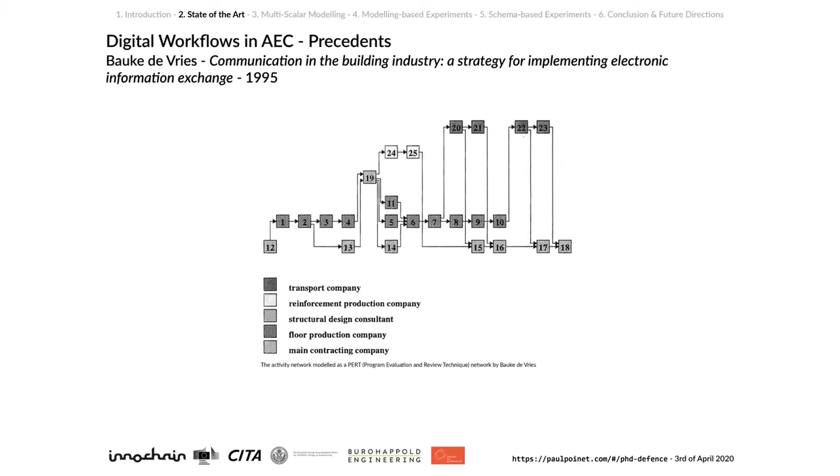And this separation of concern, actually, we have seen it emerging in the AEC industry. So now I will go through different precedents, from 1995, with Bauke de Vries, who identified different companies and identified the links between them and the data exchange between them.

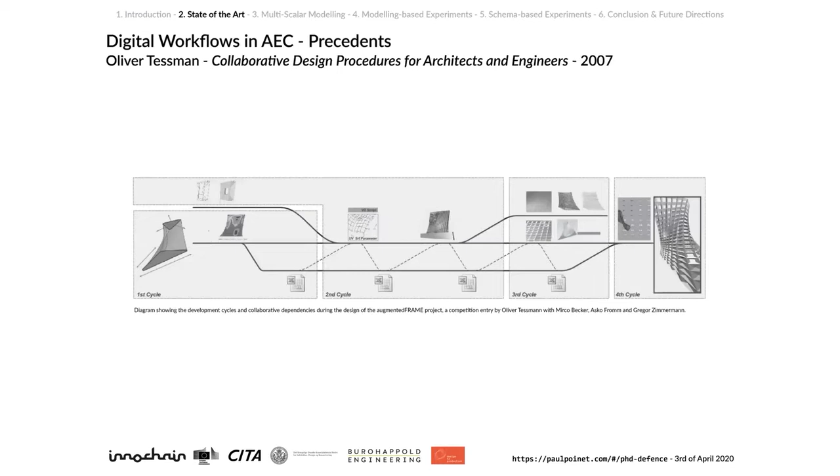To Oliver Tessman, in 2007, in his thesis, he actually identified different design cycles in the design process, design to production. In 2010, they also highlighted the different CAD models that were needed and the different extension files that were talking through each other through the design process of the Centre Pompidou in Metz.

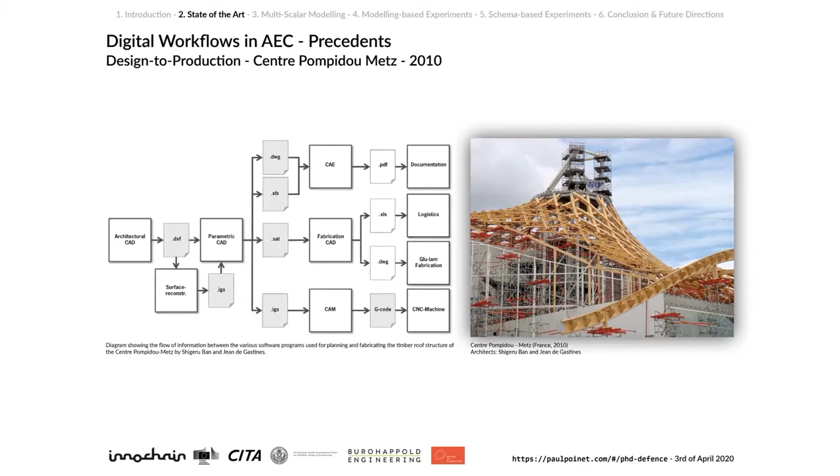More particularly, there is also this very interesting case study from Front Inc. and BuroHappold Engineering, who were involved in the conception and construction processes of the Morpheus Hotel, designed by Zaha Hadid Architects in 2015.

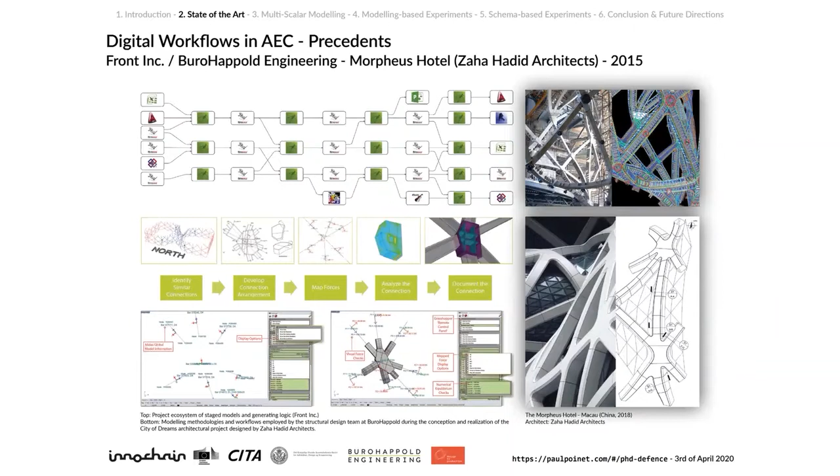So you can see on top is the building information generation from Front, where they highlighted the data exchange between different Grasshopper sessions where data was generated, and sessions of Rhino files where data was stored and where metadata was attached to. And at the bottom is more the engineering perspective, who had to deal with structural analysis at different levels and pass information between different scales.

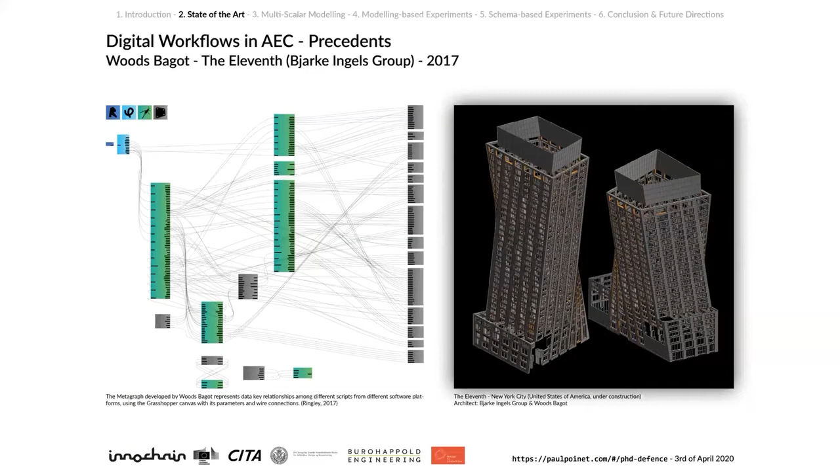There is also this example from Woods Bagot in 2017. This is the Eleventh project, a housing project situated on the High Line in New York. And here you can see they actually mapped all the data exchange between different Grasshopper and Rhino files throughout all the design process of every single building component.

Of course, this development effort does not only happen within architecture firms, but also from the perspective of the software industry. So here there is the example of McNeel, who quite recently introduced Rhino Inside and Rhino Compute technologies. Rhino Inside enables running Rhino and Grasshopper inside other applications which have a .NET API, such as Revit and AutoCAD, and Rhino Compute presents a REST API from which expert users can actually call Rhino functions on a server.

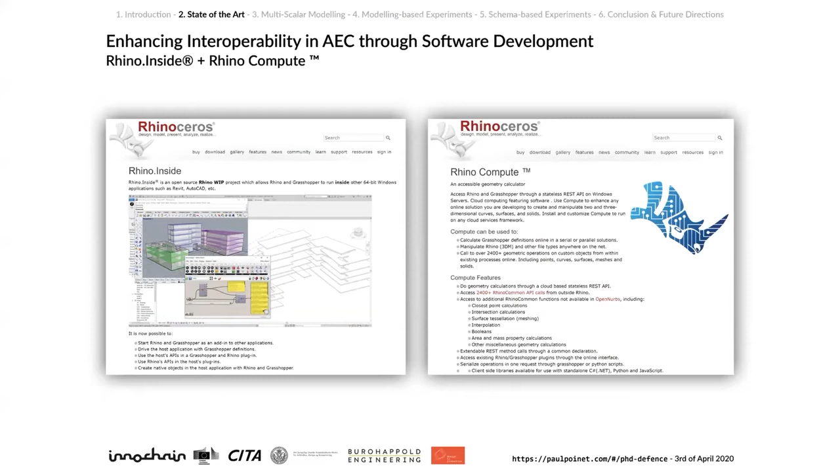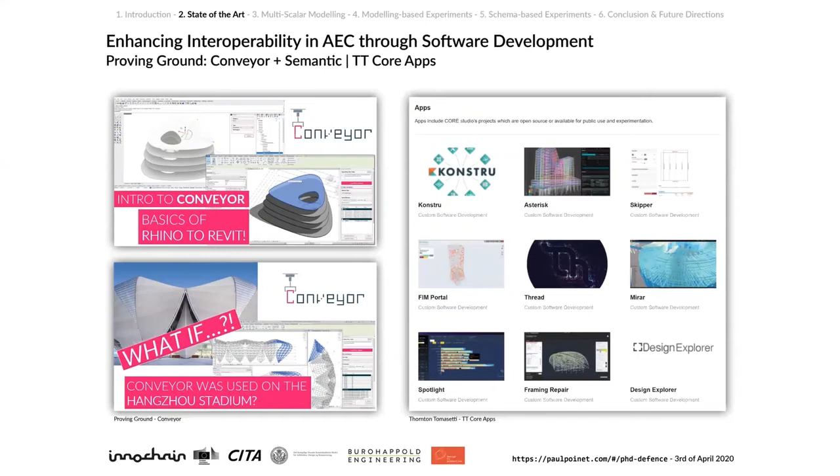Beyond the software industry, there are also consultancy practices or engineering firms that develop their own applications to help other architecture firms, such as Proving Ground with Conveyor, or the different applications developed by TT Core. And we also see the emergence of data platforms for AEC.

I'm sure quite a lot of you are familiar with Flux, which ceased to exist in March 2018 for financial reasons, but it was used by more than 6,200 companies in 150 countries, and a lot of computational designers, engineers, and BIM professionals relied on this platform. The legacy of Flux, I think, is both Speckle and Konstru. There are other data platforms for AEC out there, but those are the two main ones that I personally know, and you will see later in the presentation that Speckle was particularly relevant for a set of experiments in my thesis.

From the state of the art, we can start to extract a convergence of concepts. There is a general trend in developing neutral, open source custom tools and frameworks to break the silos. We try to improve interoperability through custom software development, enabling the transfer of data-rich and complex geometrical objects. The industry also tries to keep geometrical objects as lightweight as possible for serialization and further reconstruction, using extensible neutral formats to facilitate both object customization and interoperability. Finally, the industry always tries to segregate the different levels of modeling from design to fabrication.

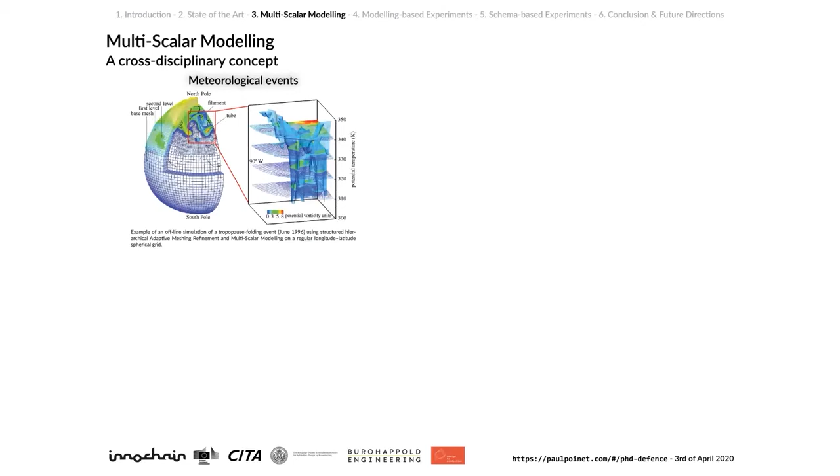This has been used, for example, to model meteorological events, or looking more specifically at material behavior, or in computational fluid dynamics or structural behavior simulation through adaptive mesh refinement. Multi-scale modeling has also been implemented more recently.

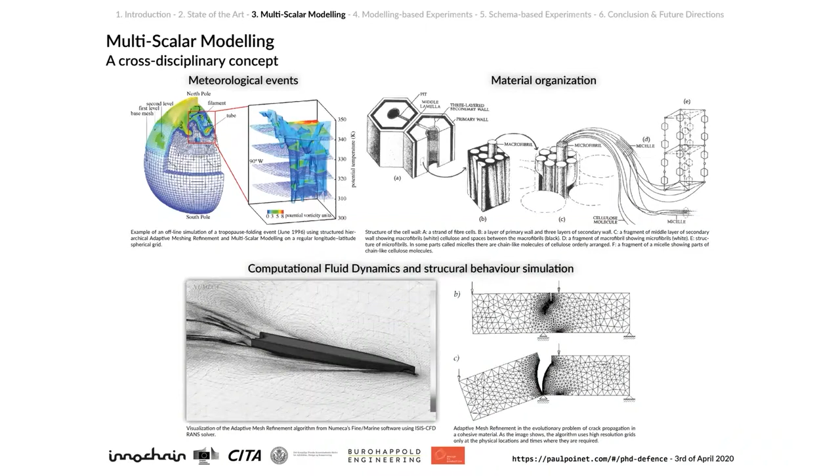And also more recently in architectural design research, through coarsening and uncoarsening strategies that allow communication between different levels. We have also seen the implementation of multi-scale modeling.

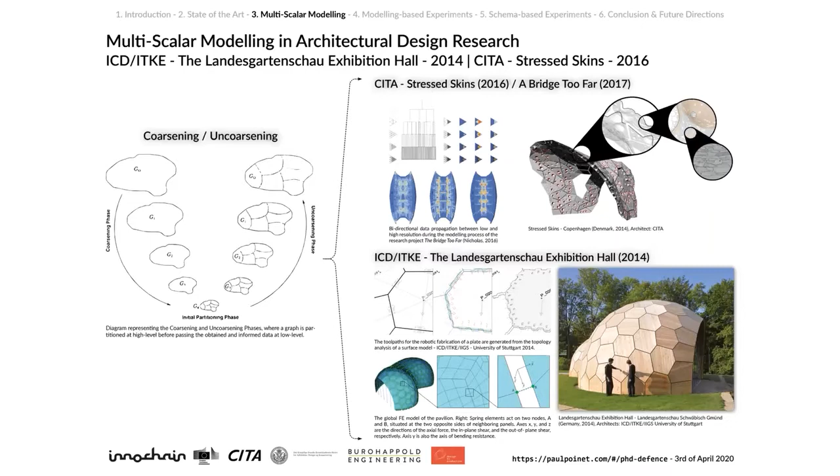For example, at CITA, through the Stressed Skins and Bridge Too Far projects, which implemented adaptive mesh refinement methods, or with ICD/ITKE, who looked at passing different simulation frameworks across different scales for the Landesgartenschau exhibition hall in 2014. The different methods try to define coarsening and uncoarsening strategies to navigate across multiple levels and resolutions, setting up connected pipelines, design workflows, and handshake techniques to deploy these strategies, as well as deploying simulation frameworks and optimization strategies across the previously defined pipelines and design workflows.

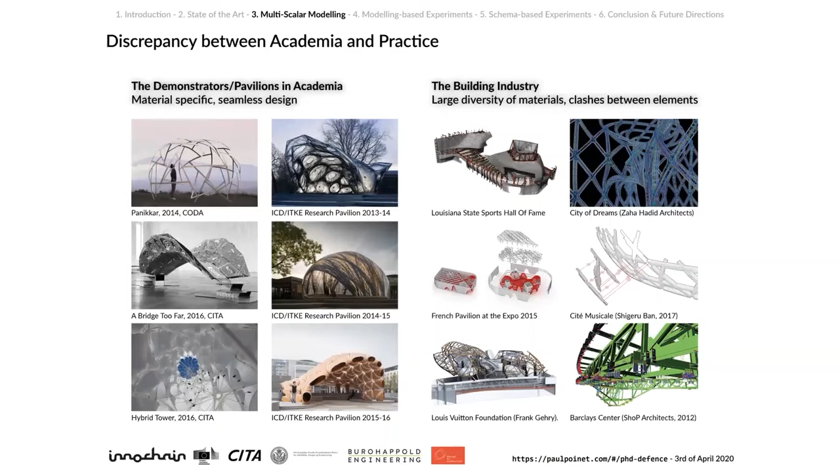However, I think it's fair to recognize there is a discrepancy between academia and practice, because all the demonstrators and pavilions built in academia present very material-specific and seamless designs, rather than in the building industry, where we actually face a much larger diversity of materials, more clashes between elements, and of course many more trades involved in the process.

In terms of data classification and data generation, I think they are also very intertwined. We can spend a lot of time upfront setting up all the workflows in academia - think of the dynamic data tree in Grasshopper - but then it's hardly sustainable at late stages. On the other side, in industry, the generation of data and classification are more independent from each other, less intertwined, so the user is more free to operate classification changes whenever he or she wants during the design process. It proves to be more sustainable at late design stages, if you think of the static layer table in Rhino. So we have these different points from the multi-scalar modeling frameworks I enumerated, as well as the points extracted from the state of the art of the AEC industry.

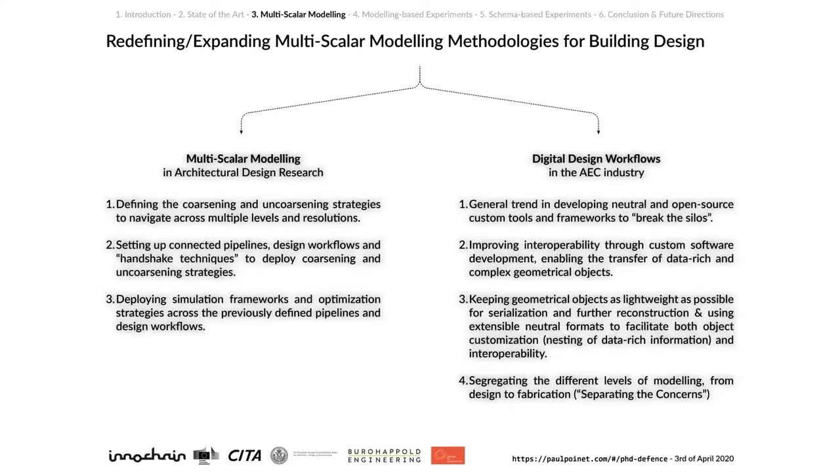The question is, can we actually expand the multi-scalar modeling framework so that it incorporates these points from industry? The overall methodology of the thesis work is placed under the scope of research through design, which involves iterative experimentation and prototyping.

Physical prototyping was defined by Thomsen and Tamke in 2009 as a materially led investigation allowing exploratory testing of craft and material behavior. But all the work of my thesis involves only digital experiments, so I look more at digital prototyping or virtual prototyping, which is a shared method of digitally designing and investigating a product or process, defined by Patrick and Lindsay in 2003.

There are different categories of experiment: design probes, and the prototypical application, a term I define which, contrary to a software application that is robust enough to be deployed through multiple machines and shared amongst different parties, remains at an experimental stage—not developed enough to be considered a proper software application.

Then the demonstrator actually deploys the prototypical application through stress tests. A stress test is a term from the software industry that verifies software through heavy load conditions. But since this thesis does not pretend to undertake robust industrial software development, stress testing here refers more to the deployment and testing of a prototypical application against multiple models or case scenarios.

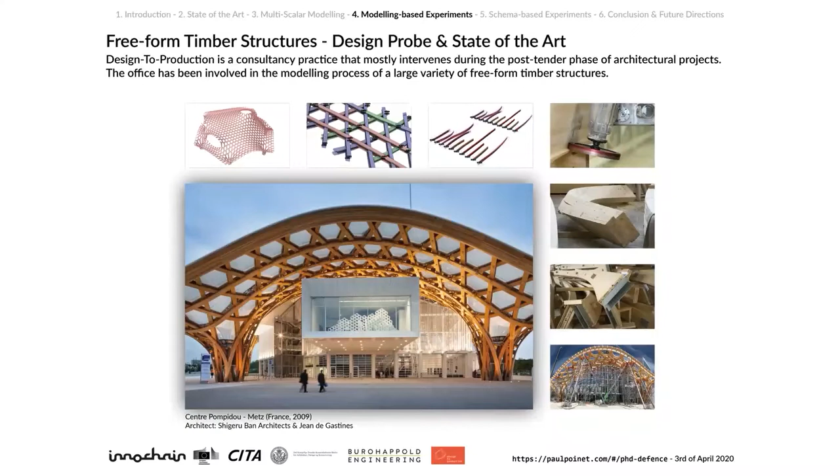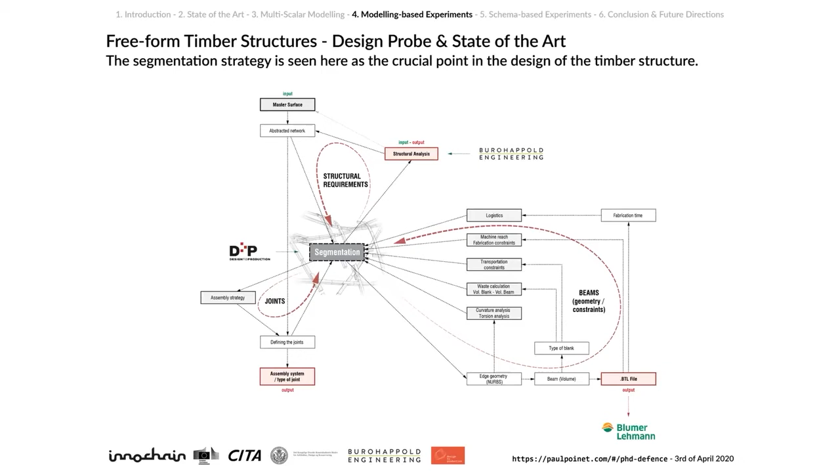As you understood, Design to Production was one of the industry partners. It was great to observe how they managed data from the global network to the modelization of particular design components. They sit at very crucial points in the design process because they have to take into account many different aspects, for example the structural requirements from the engineers to the geometry constraints and logistics from the fabricators.

So then I started to tackle this through multi-scale modeling, to define the different levels that appear through the conception of a free-form timber structure, from high level looking at the abstract network, to intermediate level looking at a patch of different components, to low level looking at one particular component and material level.

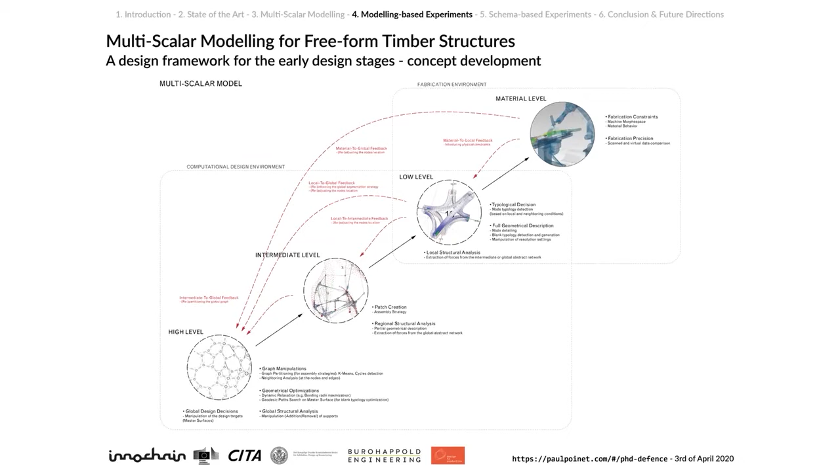Here is the first experiment, which looks at blanks. Blanks are the raw glue-laminated timber piece, which is milled down to the final shape of the segments. For different geometry complexity, you have different types of blanks that are created, from straight blanks, single curved, double curved, and so forth.

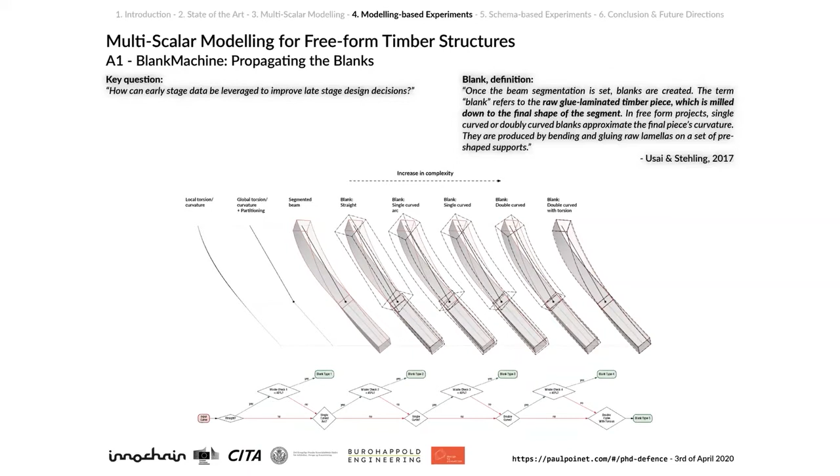Here is a video showing that by manipulating a waste percentage parameter, you get different types of blanks. The result is that this prototypical tool proved to be useful to generate blanks and steer the geometry at high resolution by manipulating very low-level parameters.

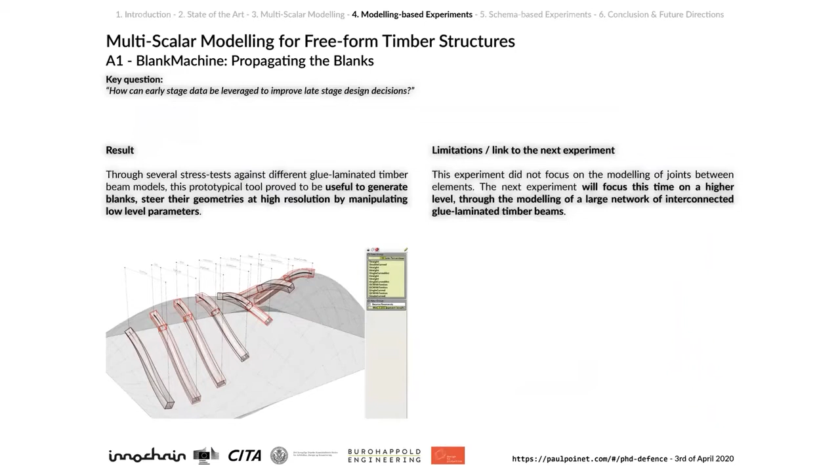But this experiment did not focus on the modeling of joints between elements, so the next experiment focuses this time on the higher level through the modeling of a large network of interconnected glue-laminated timber beams, which is topological mapping modeling of lap joints. Here I started to set a framework where communication could happen between a graph at a high level and the generation of lap joints at low level.

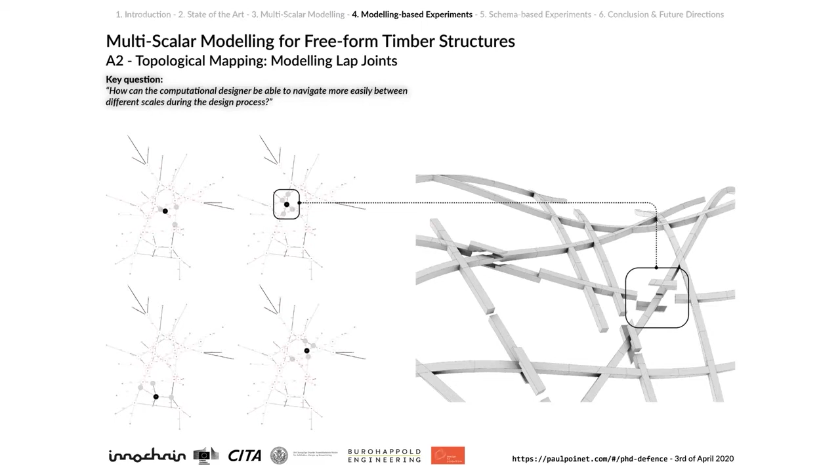The user was able to select one particular joint and look at it more precisely within the 3D model. This helped the user visualize complexity, search, and query the model in a more intuitive way than through direct modeling methods.

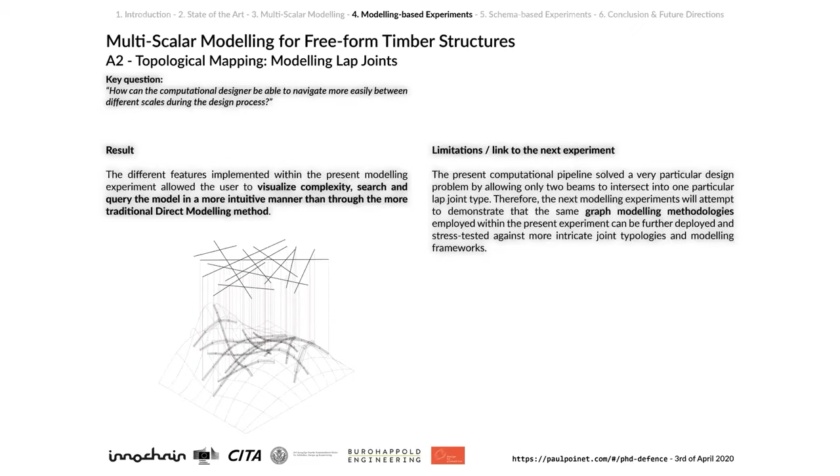However, this computational pipeline solved a very particular design problem by only allowing two beams to intersect. So the next modeling experiments demonstrate that the same graph modeling methodology employed in the previous one can be further deployed and stress tested against more intricate joint typologies and modeling frameworks.

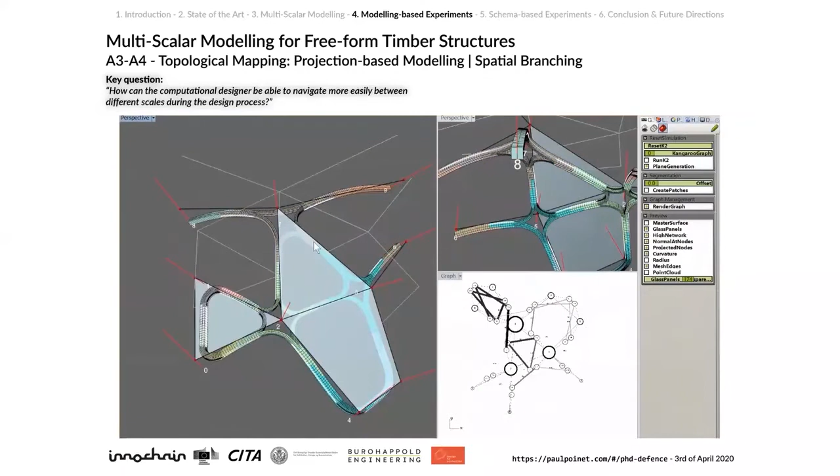This video highlights this idea where the user was able to very simply draw an abstract network at a high level, and you had direct segmentation happening at low level, glass panel generation. You are informed about the connectivity through the graph.

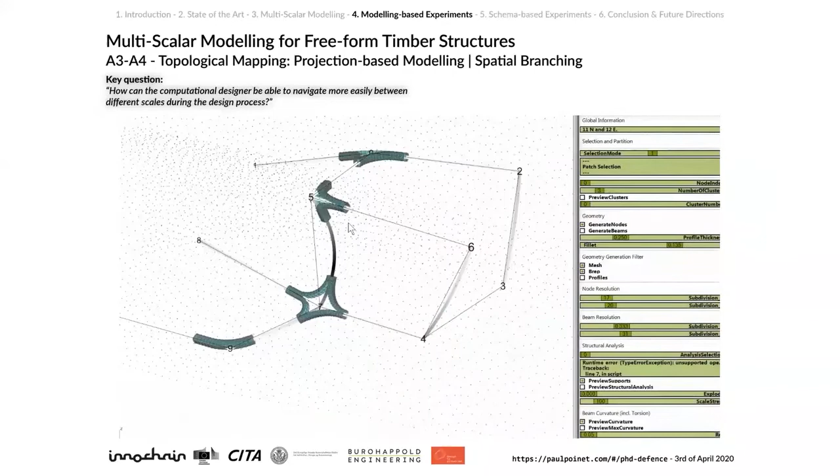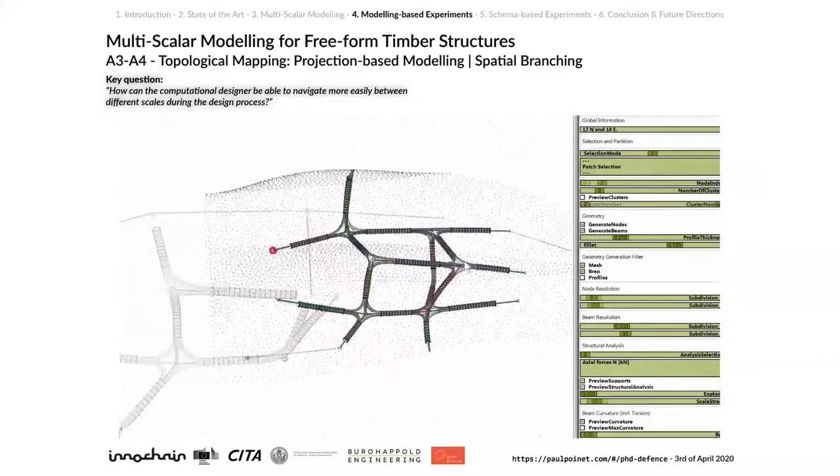This was happening only on one reference system, and then I was trying to add multiple reference systems, so different master surfaces, and also embed simulations, structural simulation, at high level and also at low level by focusing on one particular node.

These are the types of outputs from these experiments. It actually presented a frictionless user experience during the design process while navigating between the different scales. But it was actually quite challenging to craft every single design exception in such design process.

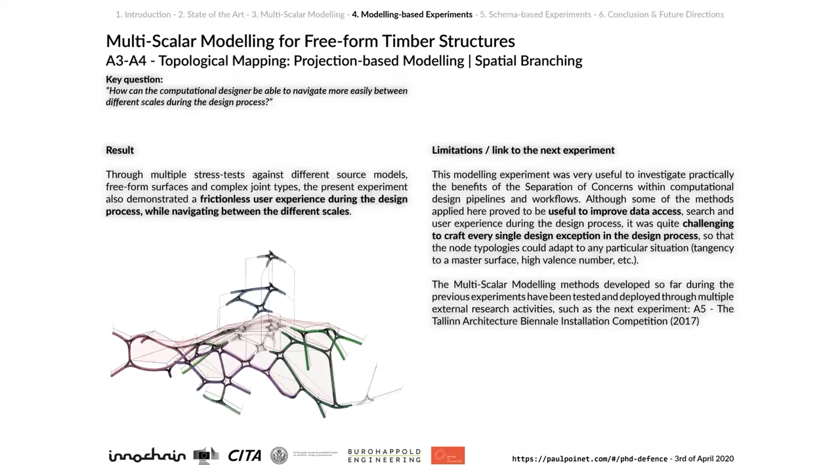The multi-scalar modeling method developed so far has been tested and deployed through other research activities, such as the next experiment, which is the Tallinn Architecture Biennale installation competition, a common work done with Thomsen, who is also a PhD fellow at CITA and part of the InnoChain research framework.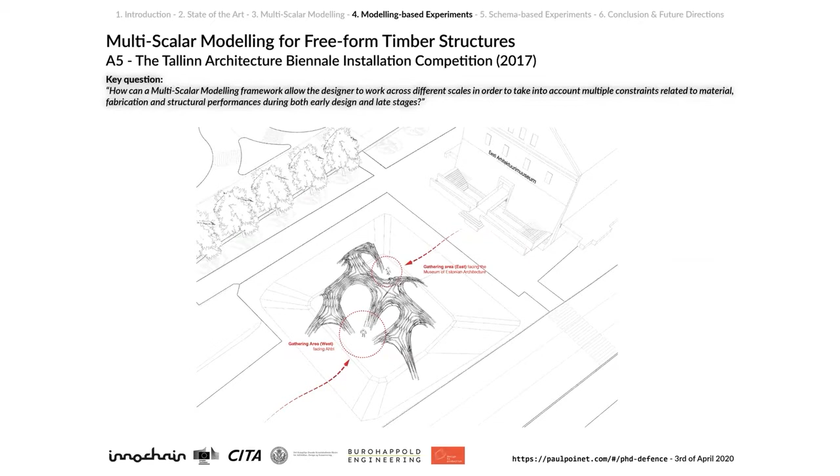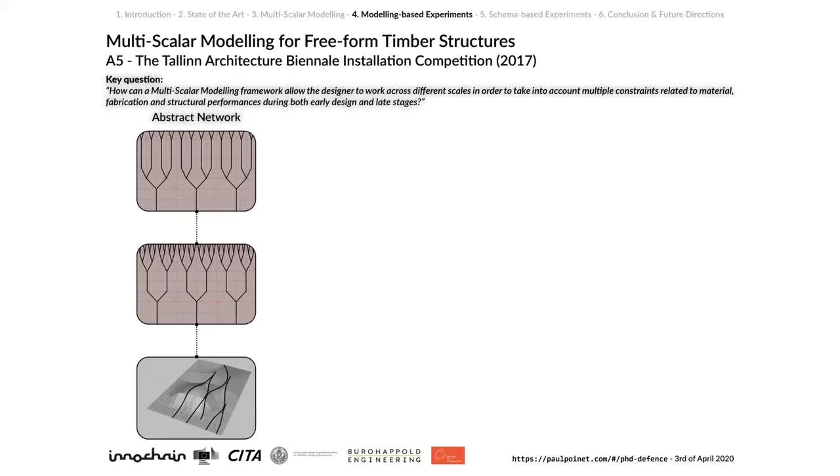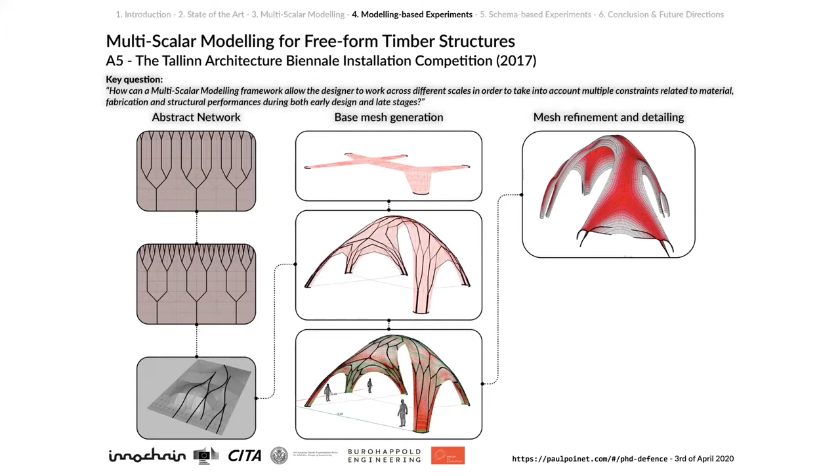You can see that during the conception phase of this project, we actually employed similar multi-scale methodologies, looking at abstract networks through base mesh generation, and then more finer mesh refinements and detailing.

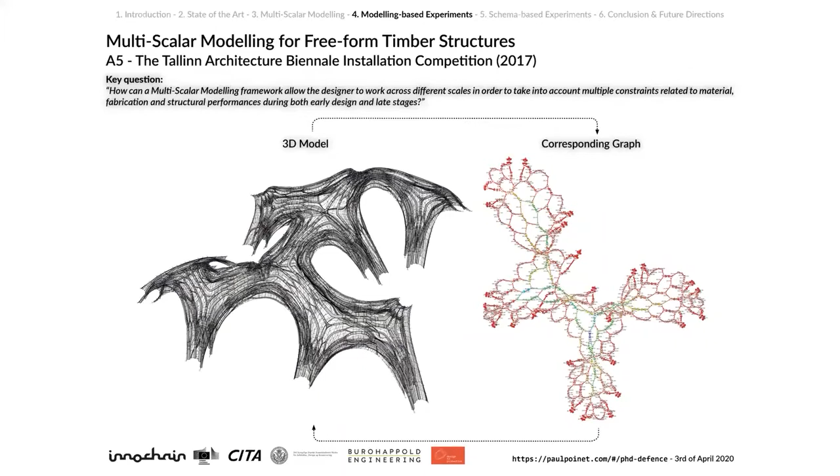So then we could actually set bidirectional workflows between the 3D model and the corresponding graph, which highlights all the complexities of every node's valence that were present in this timber structure.

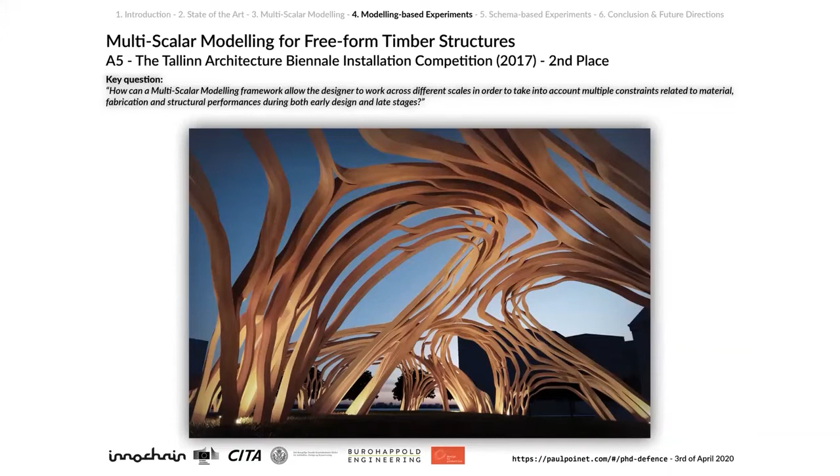So this is the final outcome, this is a render. It wasn't built, we got to the second place. But even if it wasn't built, we also looked at fabrication strategies.

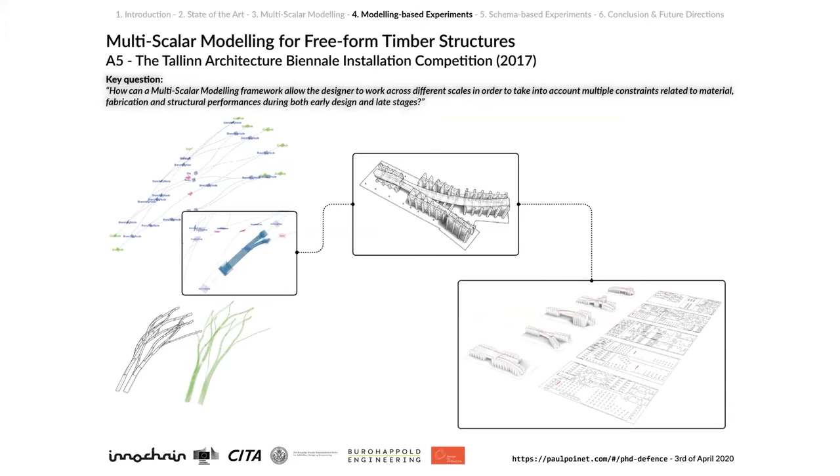How can we actually extract one particular component and generate all the data necessary for its fabrication. So here, a glue laminated timber piece.

And of course, there was also the question of feedback. So here I illustrated how we go from the mesh-based graph to the beam model, to the material model, and so on. But we also question how the lower level could actually feedback the higher level.

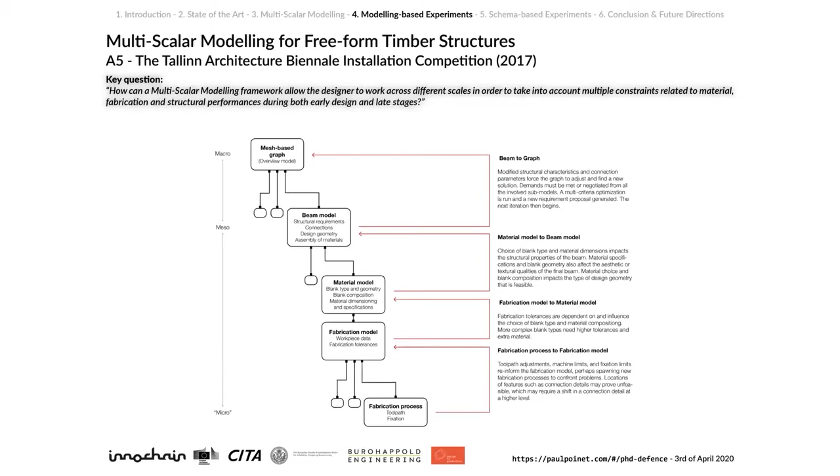So learning from this experiment, I think we realized that seamless design strategies and integrated feedback loops only exist partially and not globally. Communication can be also quite difficult, and a certain amount of residual models were created for this demonstrator scale research project.

So coming back to the discrepancy between academia and practice, I think in academia we have the luxury of total control over design intents, but in industry it's more of a fallacy. Design happens throughout the project with the participation of all trades until completion of the building.

Like this quote from Donald Knuth in 1974, who stated that premature optimization is the root of all evil. So as soon as you start implementing design and making decisions on top of your former abstract design space where you had a lot of flexibility, then the design space becomes very heavy and inflexible.

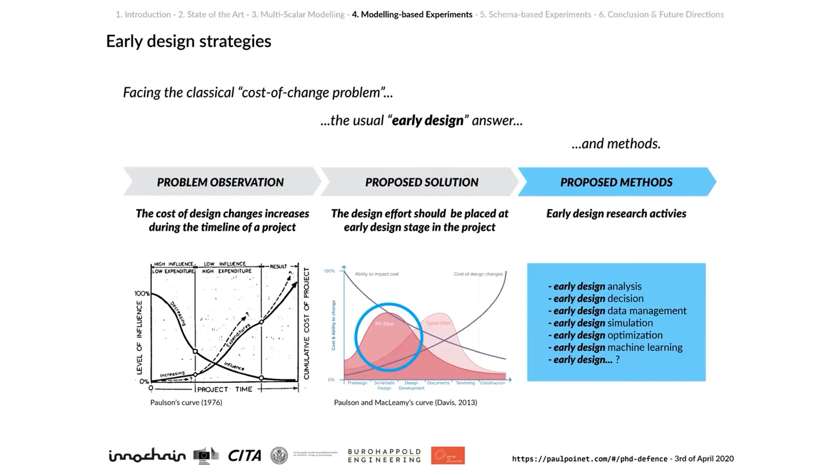I'm sure most of you know the cost of design changes curve, which increases during the timeline of a project. The proposed solution is saying that the design effort should be placed at early design stage, and then there is the consequence: methods, early stage design activities, to tackle this and flatten the curve.

Of course, late stages can be prevented, but I think they will ultimately have to be challenged. So I think we also need to focus on late stages concerns. This leads me here to the schema-based and cross-practice collaboration experiments, which tackle more particular late stages strategies.

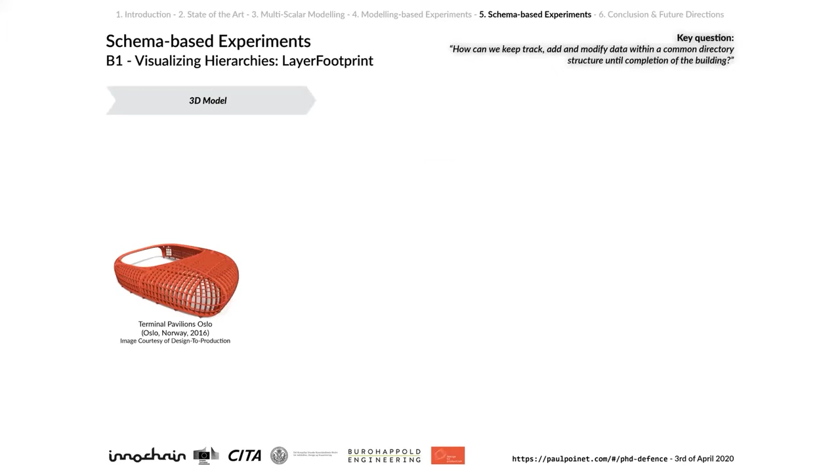Some of these trees are used to classify the data. Some are actually used to link parametrically elements, geometrical elements, such as in digital projects. So looking at this, I was also very interested to look at how Design-to-Production actually classify the data throughout all the design projects.

I was interested in investigating alternative means of representing this complexity, which led me to move from the directed acyclic graph to the more simple sunburst diagram. This sunburst diagram highlights the hierarchy between the different layers, and each offset represents the number of objects contained within one layer.

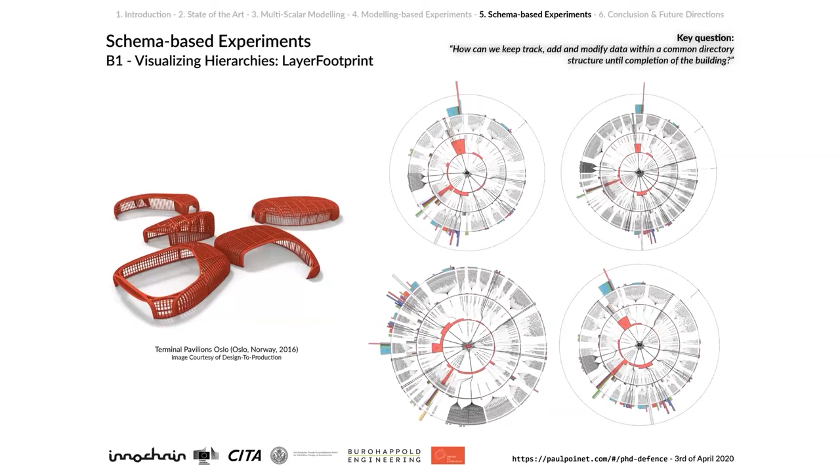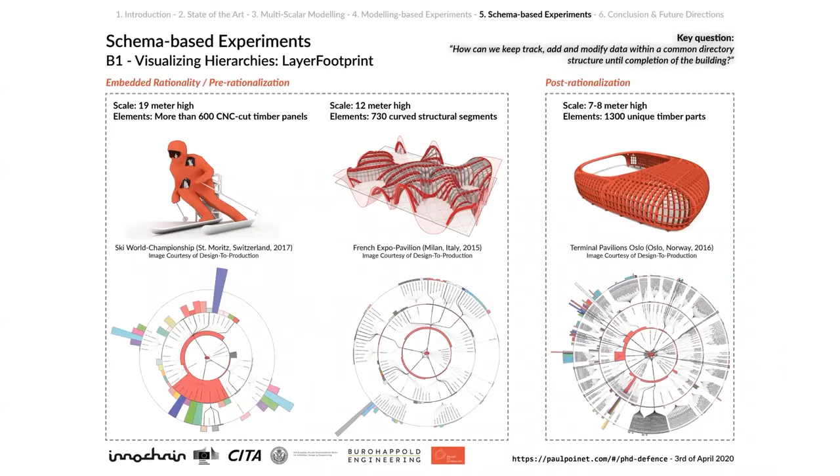So this experiment called Layer Footprint could leverage data and highlight the model's intricacy. However, the amount of information displayed by Layer Footprint may be too intricate and complex to be grasped as a whole. So the next experiment tried to extend the capability of this experiment by integrating more features.

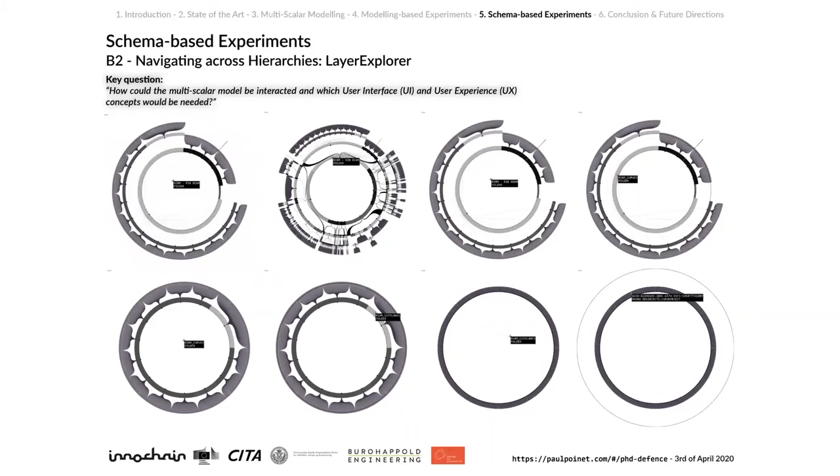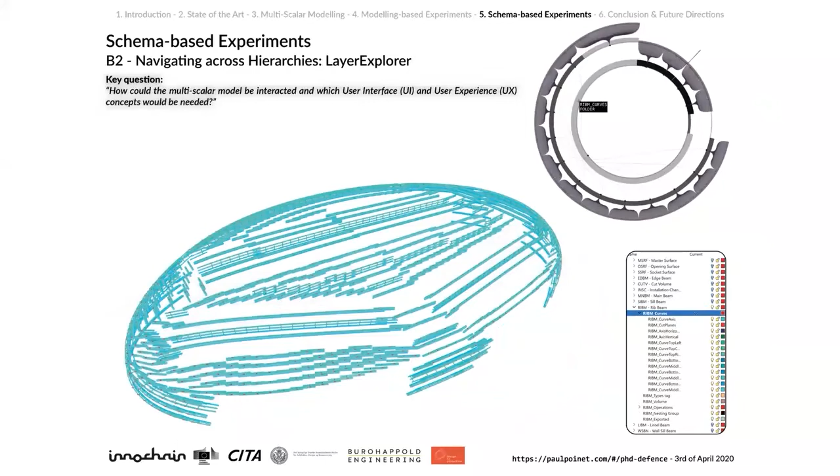Layer Explorer takes a similar sunburst diagram, but enables the user to navigate through it and focus on different branches of the layer structure. Each slide corresponds to a certain level in the layer table, and you can do that until you reach very specific components of the building.

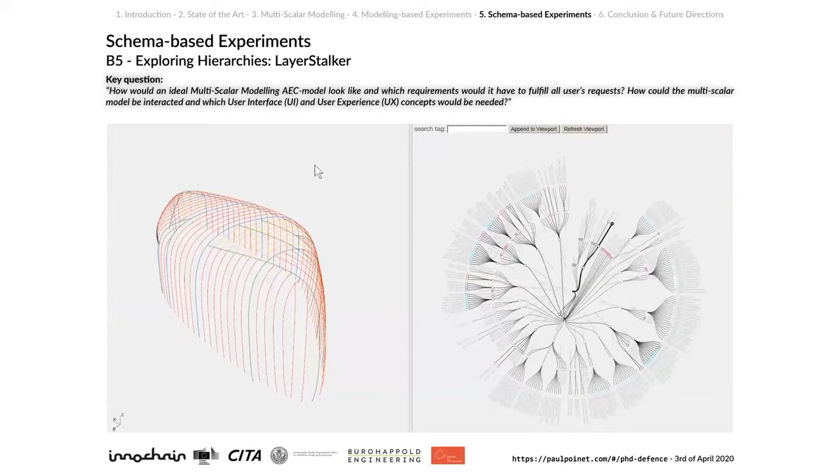Here the user is finally able to focus on local levels and navigate between them. But this experiment, although it was presented alongside the 3D view, actually operated outside the 3D modeling environment. So the next experiment tries to embed such an interface directly within the 3D model, like LayerStalker here.

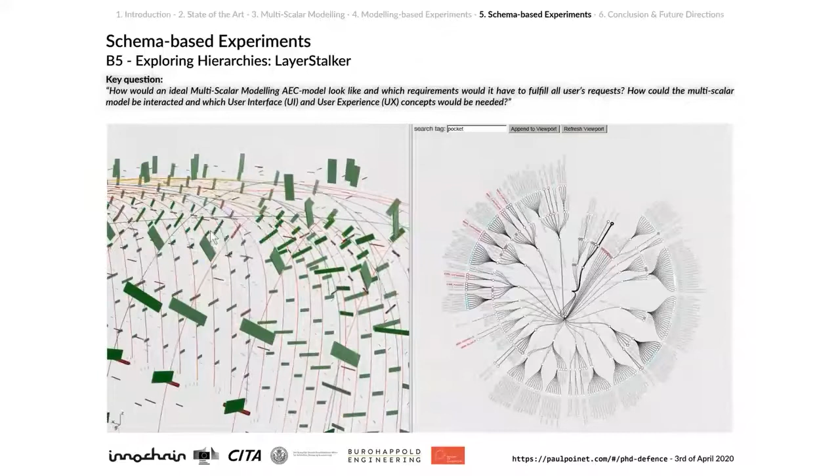This also embeds other features. The user is able to type a certain tag or word, which will highlight all the layers whose name contains this specific tag. Then you can display the corresponding information in the viewport, refreshing it, and so on.

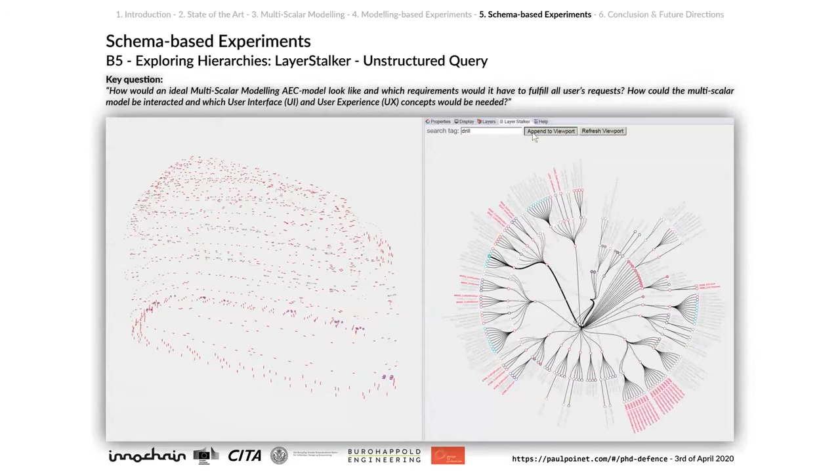So you could perform unstructured queries and structured queries as well, if you wanted to focus only on a particular leaf. This experiment demonstrated the possibility of performing both structured and unstructured queries from the 3D environment within the graphical user interface of LayerStalker.

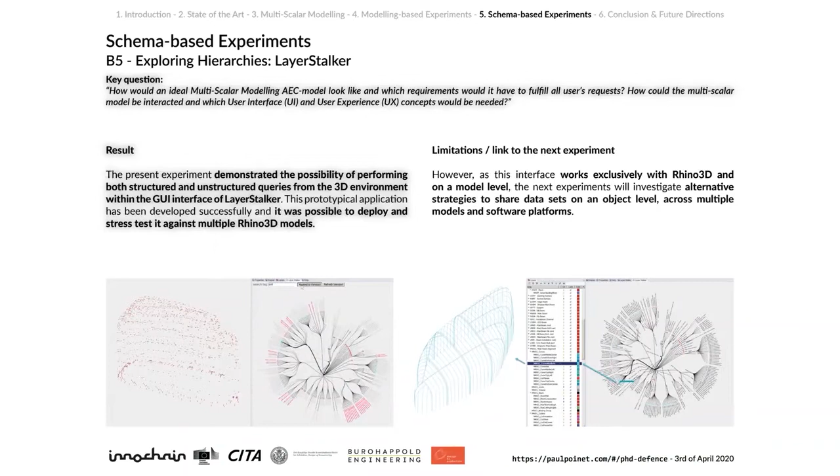But it was possible to deploy and stress test it against multiple Rhino3D models. However, this worked exclusively with Rhino, one particular software. So for the next experiment, I wanted to investigate alternative strategies to share data sets on a more object level, across models and software platforms.

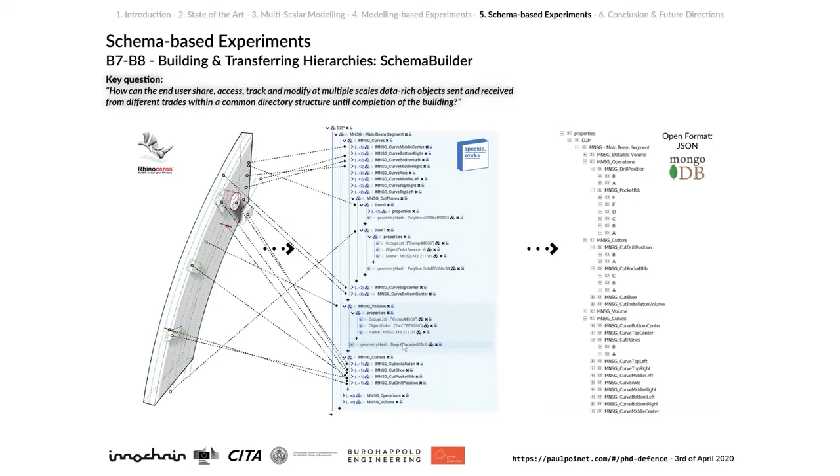So here I looked at one particular object where you can see it has many different sub-objects and a very intricate hierarchy of objects contained within it. I was able to transfer this object via Speckle and retrieve the hierarchy in another, still Rhino, but a different Rhino session.

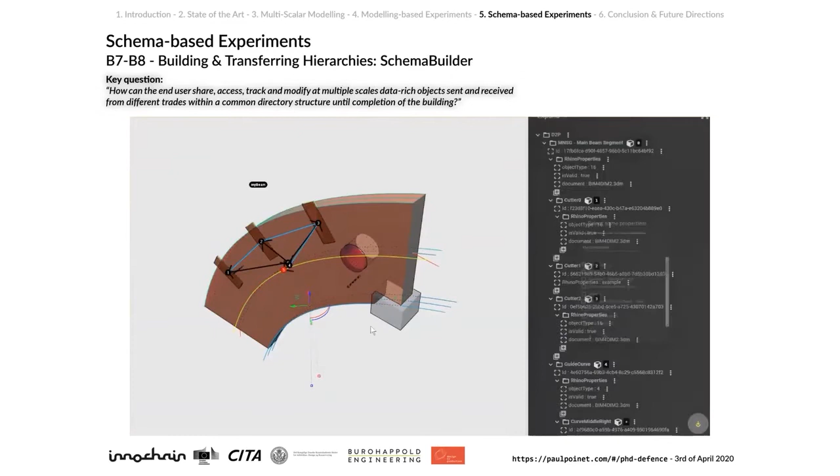Through the interface, the user is able to select one particular item and add it to the tree, select some properties to keep, and add it to whatever leaf is in his personal tree. Each time you add a sub-object to an object, the parent-child relationship is highlighted in the 3D model on the left.

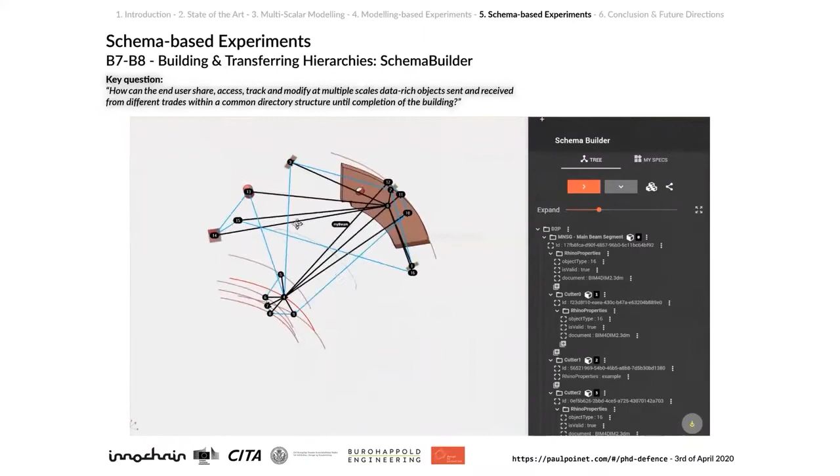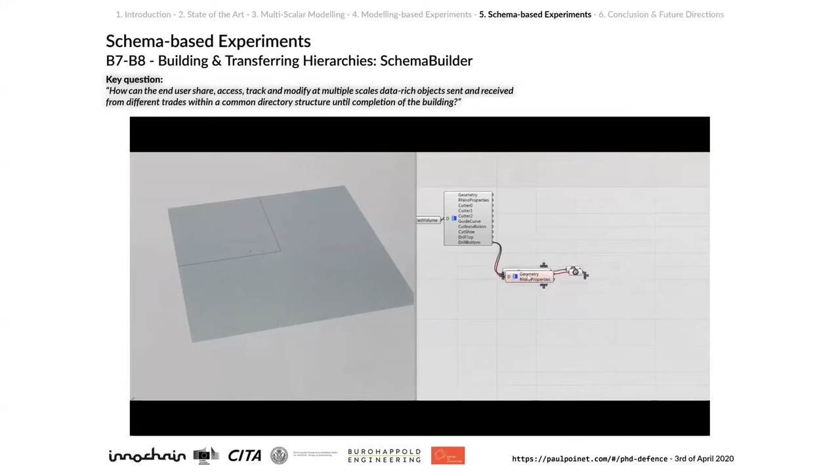Soon you will see that the object will explode, and finally you can receive this hierarchy that was sent via Speckle. You receive this hierarchy in another Rhino Grasshopper session, where you can unnest all the data contained within this object.

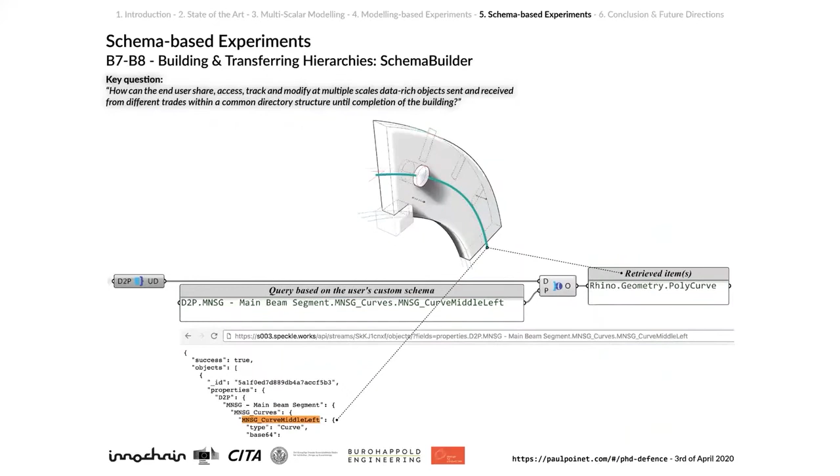You could also retrieve one particular piece of item. This experiment demonstrated the possibility of building a data-rich hierarchy of objects and transferring it via Speckle to another Rhino Grasshopper session. But in the next experiment, the data exchange operates from and to the same software platform, and the schema remains the same.

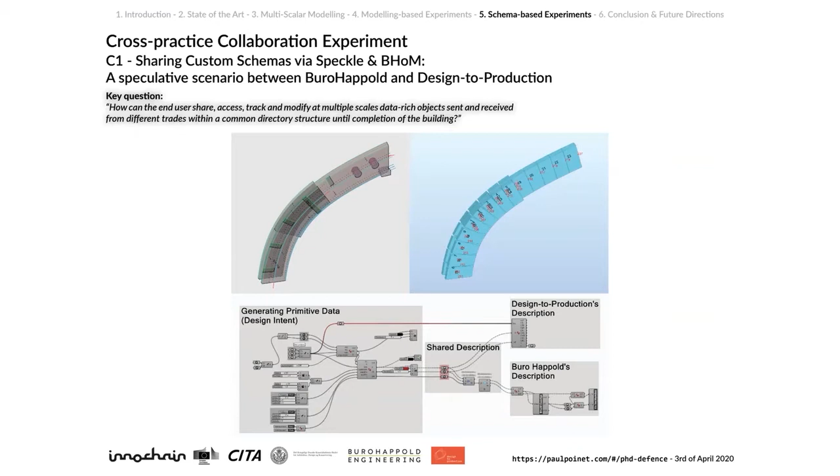The next experiment investigates how to transfer a similar object across a different host application and adapt its schema accordingly. This is the first cross-practice collaboration experiment between BuroHappold and Design to Production. You have to imagine that all the hierarchies I showed so far are from design to production, so they are really focused on the geometrical description of the objects and have their own tree structure.

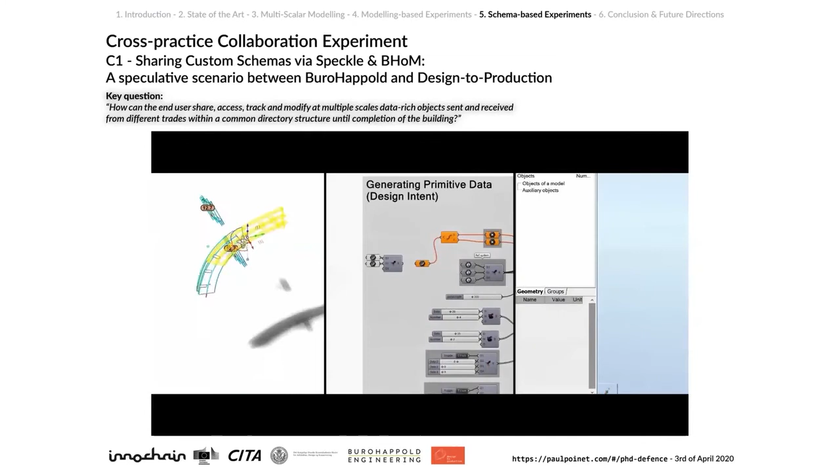But of course the engineering firm is not particularly interested in geometry, but more in the structural description of the same objects. So the company has another worldview on these objects. The question is then to identify and find the common, shared description of this object—which could be just two endpoints, or one polyline, or a set of different planes—that can be set as a shared description from which the two different companies can communicate. This is highlighted here.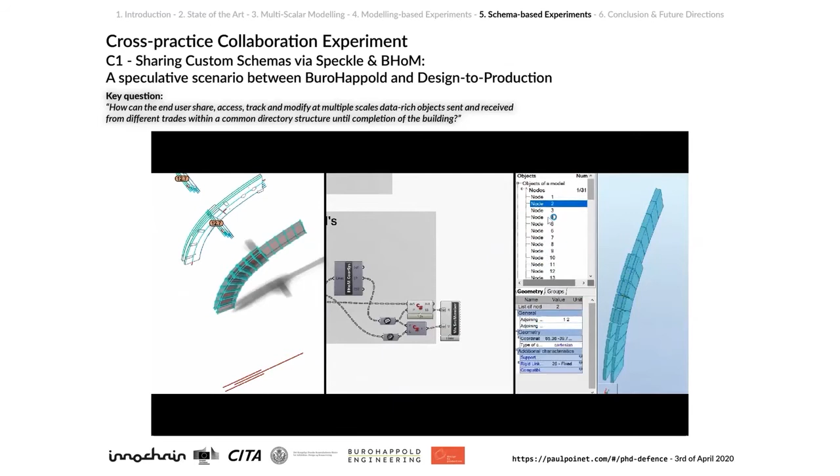So the schema actually combines a transfer via Speckle and BHoM, which is a Buildings and Habitats object Model, also an interoperability framework developed by BuroHappold. Through this experiment, you could see that you could transfer one object from Rhino to the robot software package for Autodesk. This cross-practice collaboration experiment hybridizes modeling-based and schema-based strategies to transfer data-rich geometrical information across trade and scale.

But although successful, it focused particularly on the local adaptive object schema. I think we still miss the bigger picture of the project scale. So this is what the next experiment is focusing on.

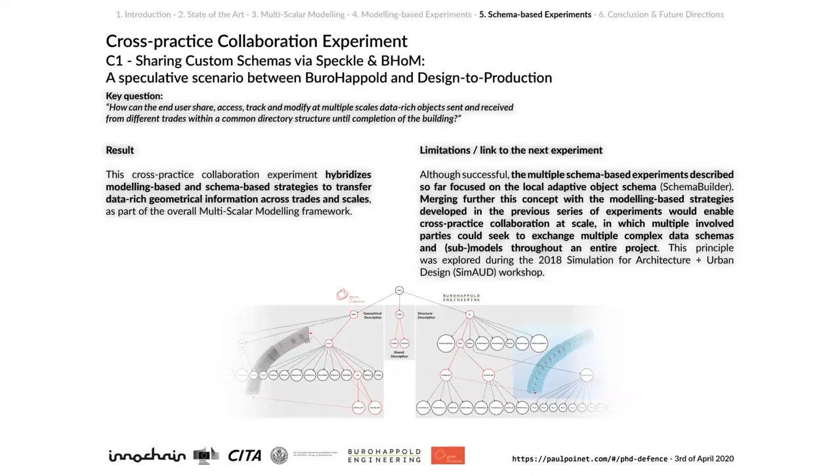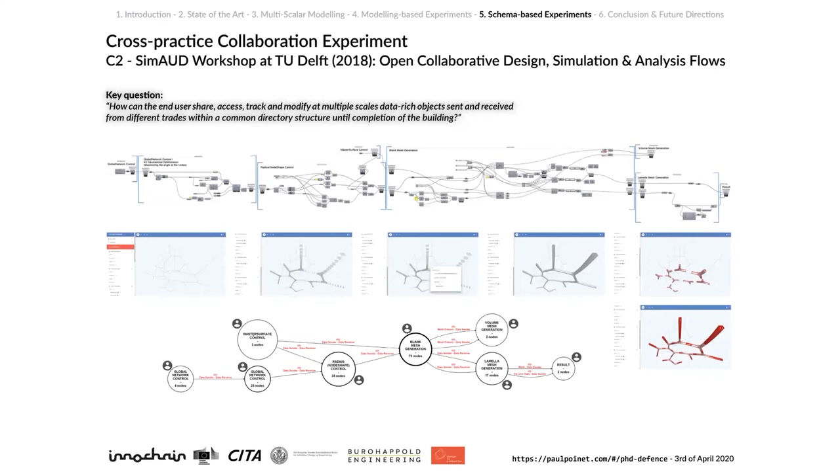So this is the SimAUD, a workshop led by Dimitri Stefanescu and myself at TU Delft in 2018, where we shared different grasshopper sessions to the different participants of the workshop. So here you can see that you think it's unique grasshopper definitions, but they are actually shared to different participants and connected via Speckle senders and receivers.

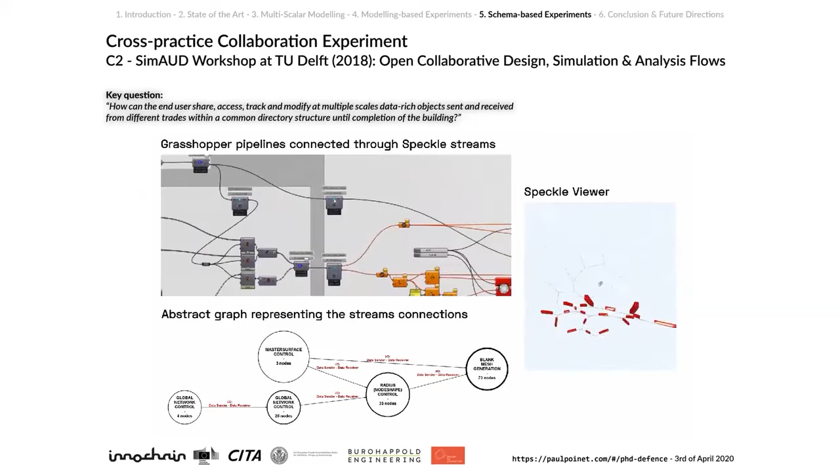And the idea was trying to automatically generate a graph that was highlighting the design exchange between the different grasshopper sessions.

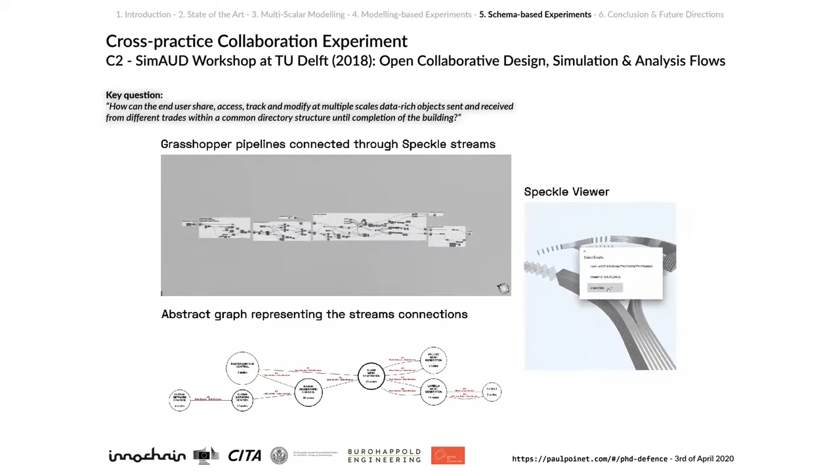So this shared workflow setup across the participants enabled them to communicate in a seamless manner across their respective design space. So although segregation proves to be useful to separate the concerns, I think it does not mean that communication should be disabled. Instead, communication channels should be maintained with the possibility to enable them whenever the design users wish to stream the data during the design process.

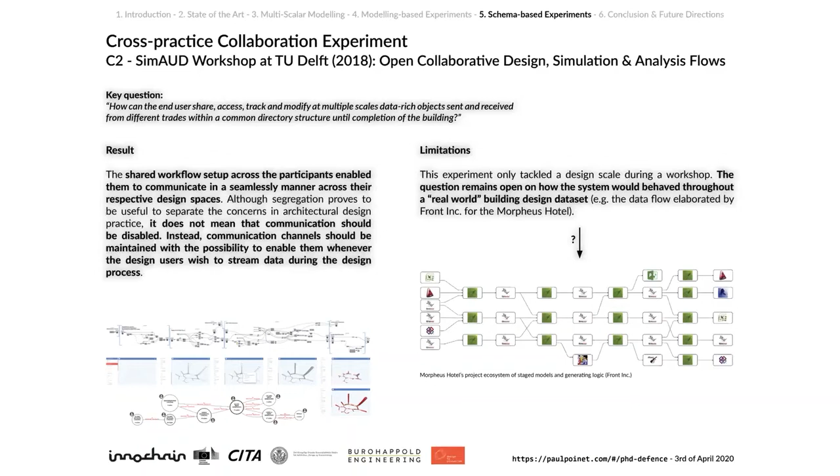But this experiment only tackled a design scale during the workshop. Of course, the question remains open on how the system would have behaved throughout the real-world building design dataset. So here I placed back the Morpheus Hotel project ecosystem, which I think could benefit from these experiments.

So what I think is that the further hybridization of the modeling-based strategies and custom software application constitutes actually the final multi-scalar modeling framework for building design, allowing for both integrative automated tasks at early stages and more direct data manipulation at later stages.

So if we look back at the different experiments, first you have the early design stages strategies, but at some point I think that the complexity becomes too high. So I think that we need to look at more like an object level, how we can actually build, assemble, and share schemas for specific objects.

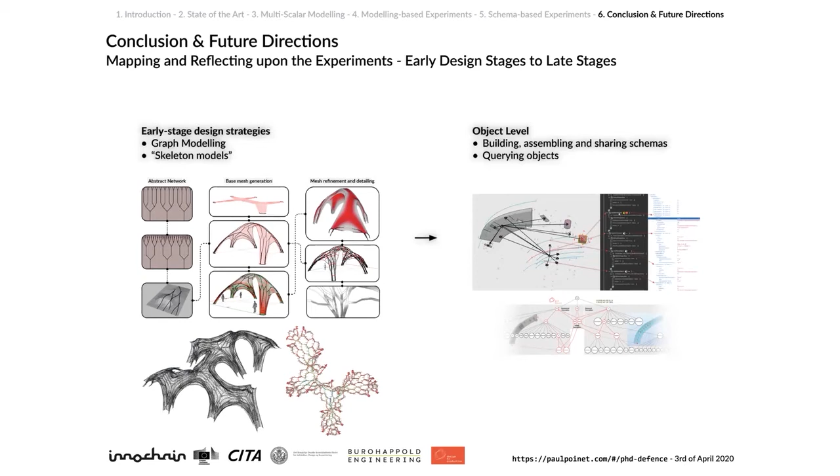Then from this we can move to a more like model level where we can actually leverage, visualize, query, navigate through more like larger datasets on a model level. So by model I mean just like a full Rhino model.

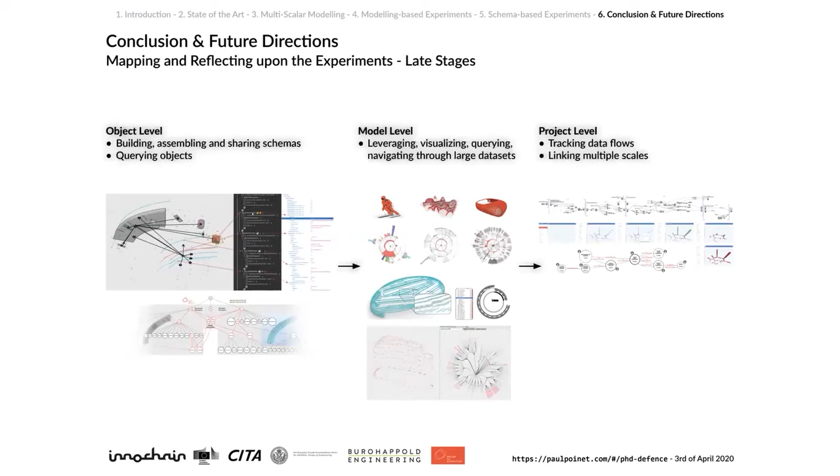And then we can move forward to the project level, tracking data flow and linking multiple scales together. How can we keep track, add and modify data within a common directory structure until completion of the building?

So developed through the present thesis work, Layer Footprints allowed to visualize complex architectural datasets. Layer Explorer and Layer Stalker enable the user to visualize, navigate through complex schemas in a more sustainable way, and Schema Builder enabled building data-rich custom geometrical datasets that could be directly shared and queried through the open source Speckle platform from and to multiple Rhino 3D documents.

So although the mentioned common directory structure has not been developed independently through the present thesis work, the theoretical multi-scalar modeling framework has been partly demonstrated through the use of an open source communication platform, Speckle. So it is suggested that the underlying object infrastructure of the multi-scalar modeling framework should remain open source.

And then 3: how would an ideal multi-scalar parametric AEC model look like, and which requirements would it have to fulfill all user requests? How could the multi-scalar model be interacted with, and which user interface and user experience concept would be needed? I think that the integration of the developed prototypical application within a common directory structure or open source communication platform would partly shape the ideal multi-scalar modeling framework for AEC.

Realistically speaking, I really think that user requests might change and evolve over time, and it is difficult to give a clear picture of the final developed interface that would be gradually improved before becoming more and more crystallized. I'm making a digression here because this work is not part of the thesis work, but more like future direction and perspective. I think that some of these implications can be integrated further within software.

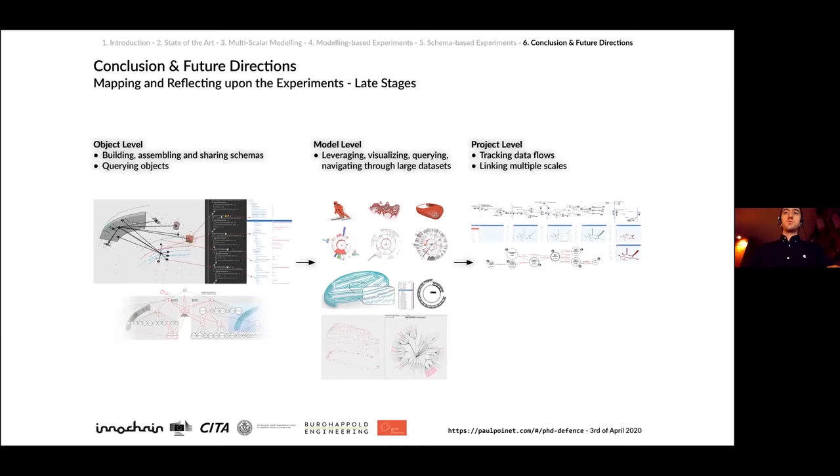Okay, so the last experiments that I was presenting in the presentation, the workshop experiments where we were mapping the different users and the different data exchanged - this concept was brought further, and this is now a web application that is part of the Speckle.

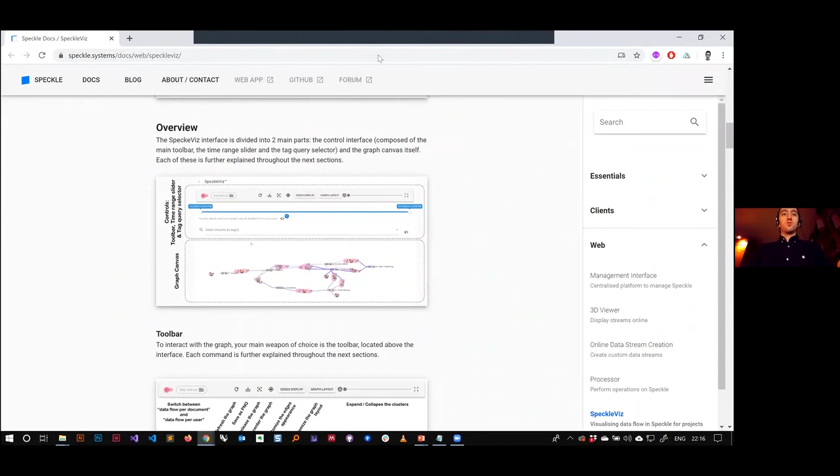So this is the part that shows you all the documentation. There are different features that enable the users to see where the data is actually going from and going to. So you have a different set of icons - this is to say that the data is sent, this is to say that the data is received. This icon is a grasshopper document that has different senders and receivers from Speckle.

You can also map users, so this is me based at UCL, where I had a bunch of different receivers and different senders. There are more user implementations where the user is able to select different nodes and navigate within the graph. You can also shift the view between the data flow per users in blue, or the data flow per documents in pink. You can always click on a specific stream - a stream in Speckle is a collection of objects - and view it in a viewer, or use the filtering feature by time, where you can see the data actions that happen in a specific time in a research project. So this is what I developed further after the PhD work through the AEC Delta Mobility project.